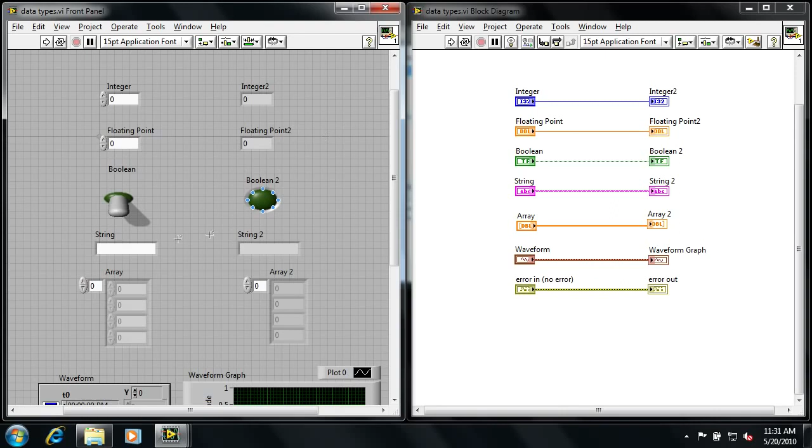And if we look over to the computer here, I've already got a very basic LabVIEW program written, or a VI, and I've just dropped down a number of different data types to show you what they look like. I've got a column of controls here: an integer control, a floating point numeric control, a Boolean switch, a string control, and I've just picked a variety of different things. I've also got a corresponding display, or indicator, on the right hand side to show you what it looks like when it's actually being displayed to the user.

Let's type in some values here. I'll type in the number 7, let's say 9.25 for a floating point number. I've got a Boolean toggle switch here, and we can type in hello on the string control, and if I hit run, you can see the corresponding values are then propagated across to the corresponding displays.

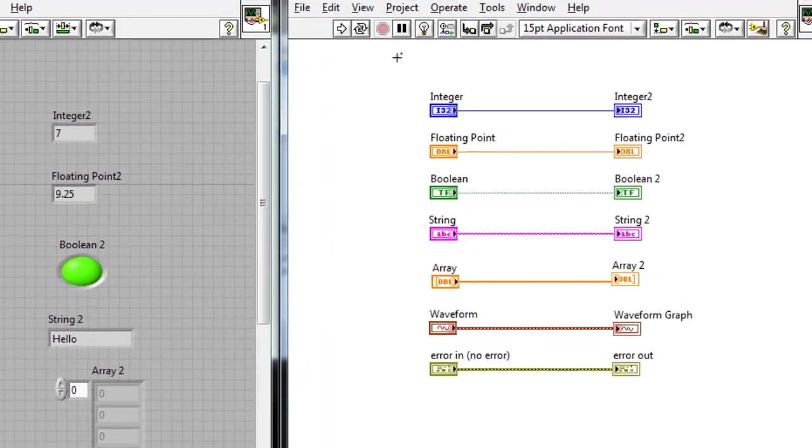If we look at the block diagram, you can see each of these different data types is actually represented by a different color. In fact, I can also open up the context help window in the top right hand corner, this question mark window, and now as I hover over each of the different objects on the block diagram, it tells me a little bit more about what that object is. I can also hover over the wire itself, and I can see that the data type of that specific wire is, in this case, 32-bit integers, or in this case, a double precision number. So I get information on how data is passed between the different wires.

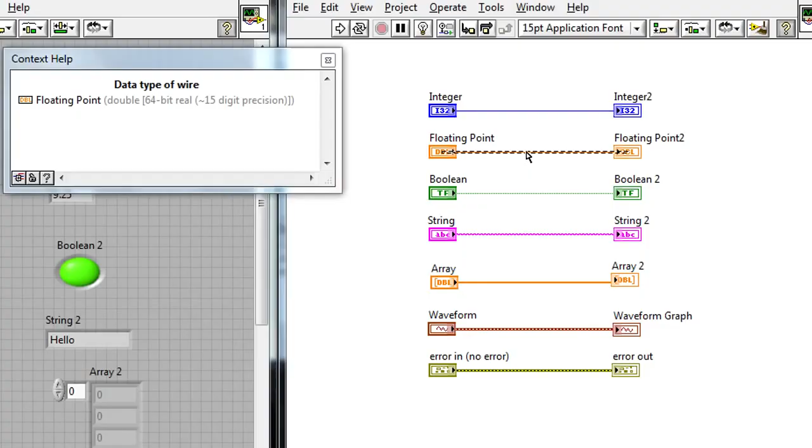And in LabVIEW, if I want to convert between different data types, I've got a few options. I can break this orange wire here, which represents floating point numbers, and wire this blue wire, which is integer numbers, over to the floating point indicator. Because both floating point numbers and integer numbers represent numerics, LabVIEW can automatically convert the blue integer number over to this other data type. And if you're paying attention, you can see a red coercion dot has appeared here that shows LabVIEW's seen that they're two different data types and it's done the conversion for me.

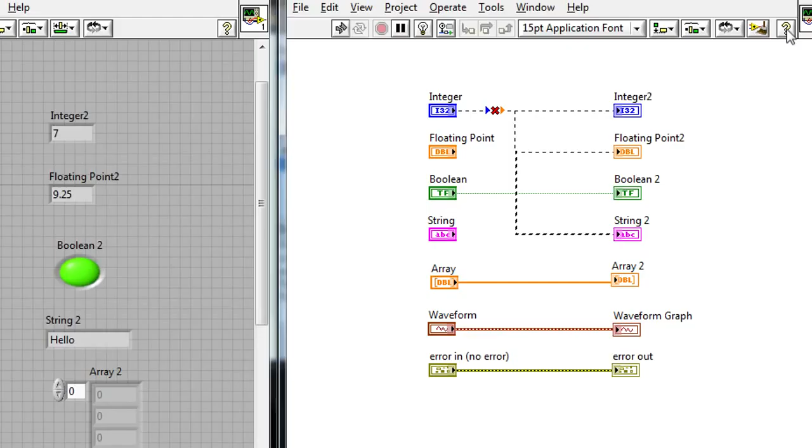If I wanted to convert between two data types that are a little more different, let's say a number to a string, if I try the same thing, I can delete this string wire, wire the blue wire to the string indicator, and I get broken wires. A broken wire means that there's some type of incompatibility between the data types. I can also hover over the broken wire itself, and LabVIEW tells me that I've connected two terminals of two different types, and I need to provide a little bit more information to show how to convert from one type to the other.

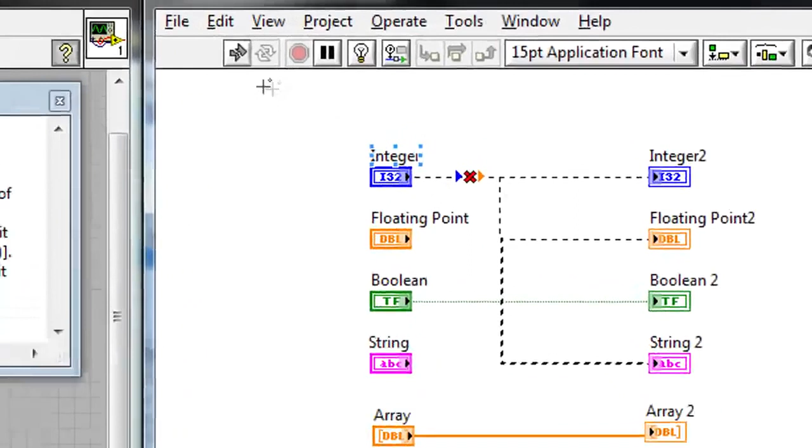The other thing I'll point out is in this broken wire state, if we look at the top corner where normally we see a run arrow, in this case we see a broken arrow. That broken arrow means that there's errors on the block diagram and my program's not going to execute. I can click on that broken arrow and it gives me an error list. It tells me where it sees problems, and if I double click on the error itself, it takes me right to where that broken wire is.

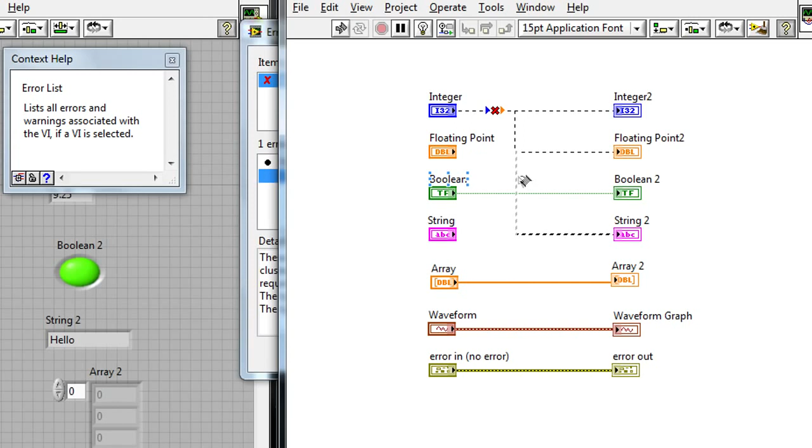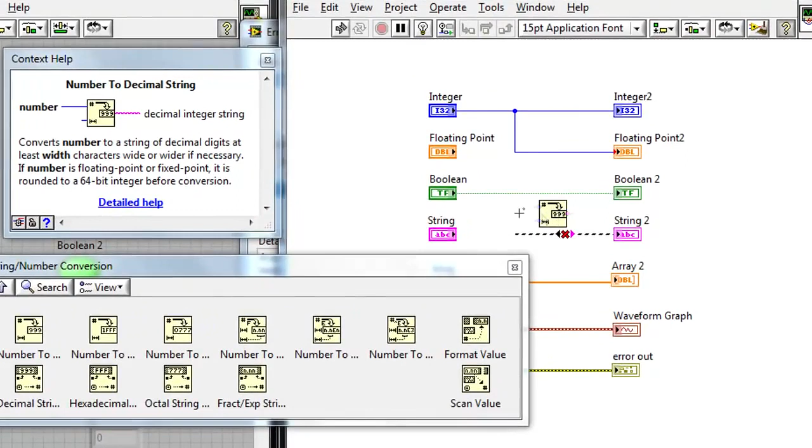Well, we don't want errors, so let's break this broken wire here, and if I right-click on the block diagram, on the functions palette I can go to the string palette and look at this string/number conversion subpalette. These are functions specifically for converting between numbers and strings. I can take the number to decimal string function and drop this down on the block diagram, then wire that integer wire over to the function, and the output of that function over to the string indicator. So now I've effectively converted the integer over to a string, so LabVIEW now knows how to associate and convert that data type.

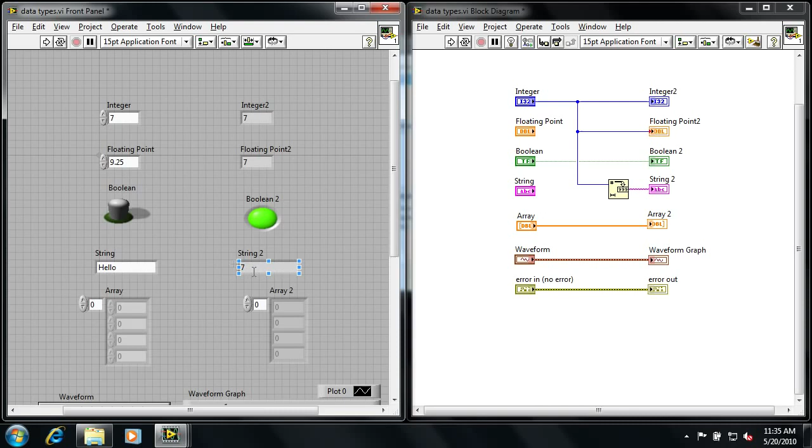And now if I hit run, you can see instead of this indicator saying hello, it now says 7. So that integer value is now propagated through the wires. I've converted it to a textual value, and I've successfully implemented that number in a string format. So that's how different data types work in LabVIEW graphical programming.